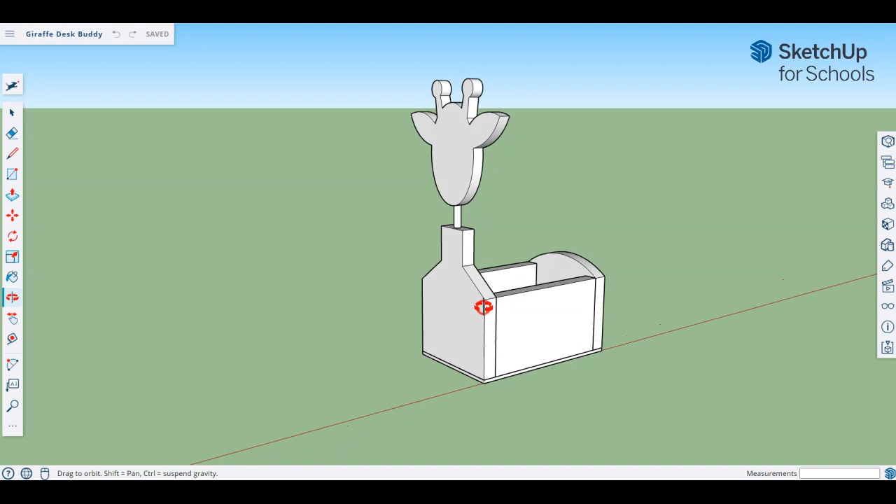Hello students. In these videos we're going to look at modeling in 3D via SketchUp for Schools, our desk buddy. So this is a basic desk buddy that I have done. You might be able to tell that I'm hoping for it to look like a giraffe, and I'm going to be doing this in 3 stages, I think.

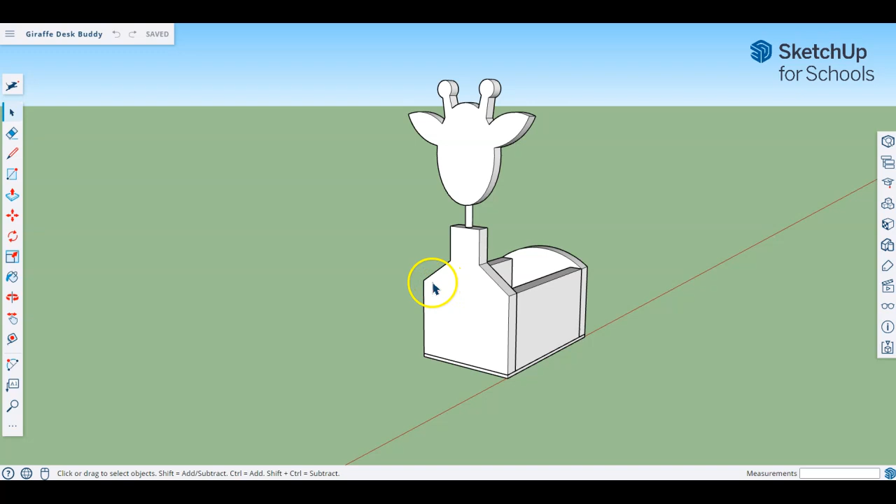The first stage, which will be in this video, will be modeling the basic desk buddy shape. The second video I think will be adjusting or modifying it to have more of this shaping, like the curves and the neck and so forth. And then I think I'll do a third video where I'll go through how to make this headpiece. It looks quite complicated, but it's still using the basic idea of simple shapes being added and subtracted away from each other. So most likely this will be a 3 video process.

And I do think though that the head will be the longest video. So let's start with this video looking at how we can just model the basic shape of the desk buddy, the main box area. So I'll start first of all with a new file.

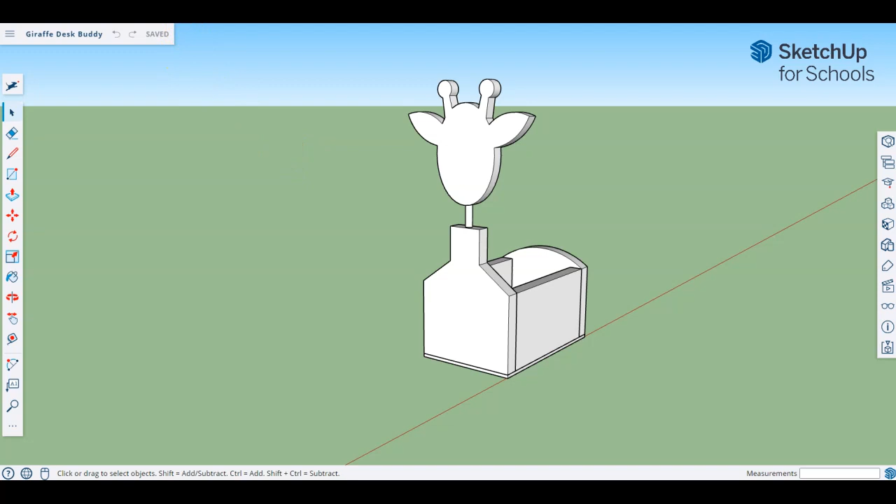So I do have one ready to go. You'd have to obviously log into your SketchUp using your school account and get yourself ready. Now, the first thing that we tend to do is remove the little person here. Remember, they've just been added for a bit of scale.

We don't need them. And I'm going to now create this basic box using a few different methods that you can use and apply to different designs. So I tend to create things in SketchUp mostly from a flat beginning. So I'm going to start with the base.

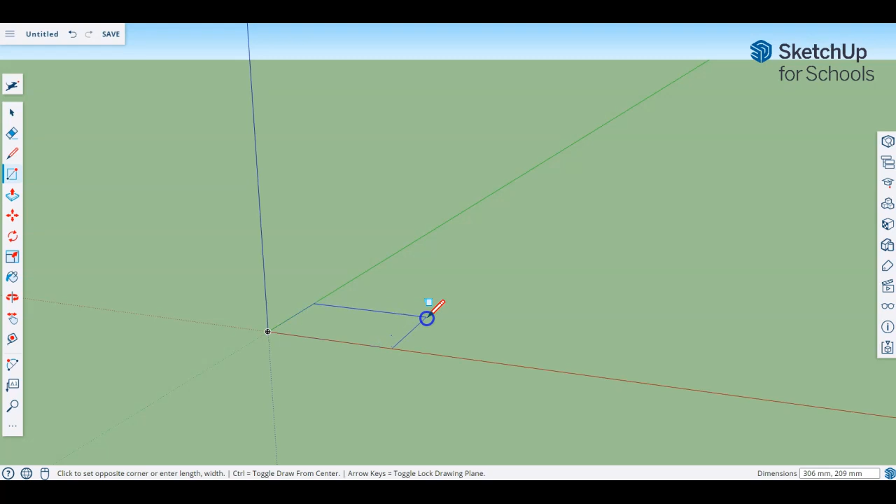Now the base is a simple rectangle, so I'm going to be using my rectangle tool. And I do like to begin all my models from the origin, it just seems like a good place to start. So I'm going to begin by drawing just a basic rectangle. What I'm looking for here is that it is longer in one direction than wide.

That is so that when I let go of my basic shape like I have here, I can look down here in the bottom right hand corner and I can see which of the two measurements is going to be the length, the one going across the red axis, and which would be the width. Because what I want to do now before I click on anything else is type in the correct dimensions.

Because what I've drawn here is something that is just a rectangle of any size, but I want it now to be the correct dimensions. And for the basic box for our desk buddies, that is 140 millimeters long by 90 millimeters wide. So that is 140 millimeters along the length and 90 millimeters on this width.

So we'll do that by typing in the numbers 140, and if you look down the bottom right, you can see in that dimensions box as I type them, they're coming in. So 140, comma 90. The 140 will be the measurement for this direction, and the 90 will be the measurement for that direction. Now I haven't entered the millimeter unit in.

I don't need to because my file already knows that I'm working in millimeters. However, you can add the millimeter unit if for some reason you wanted to use a different unit of measurement. But basically at this point, if I press enter, it has now resized what I just drew to use the measurements that I've entered in. And that is a very, very powerful thing to do.

With most of the tools, when you're adding or subtracting something to your model, if you draw or create the piece and then you let go of your mouse button, for example, and then you immediately start typing, you'll be able to enter in the measurements. And we'll be doing that a number of different times. So let's have a look.

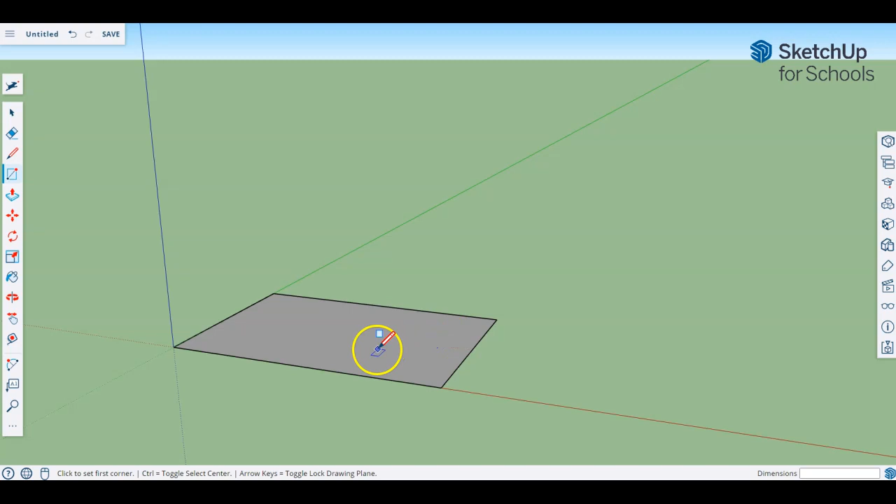If I zoom in a bit closer now, this is the size of my base that will be pre-cut for me. And it's going to be made out of plywood, and that plywood is going to be 3 millimeters thick. So I would like to pull this out to make it also 3 millimeters.

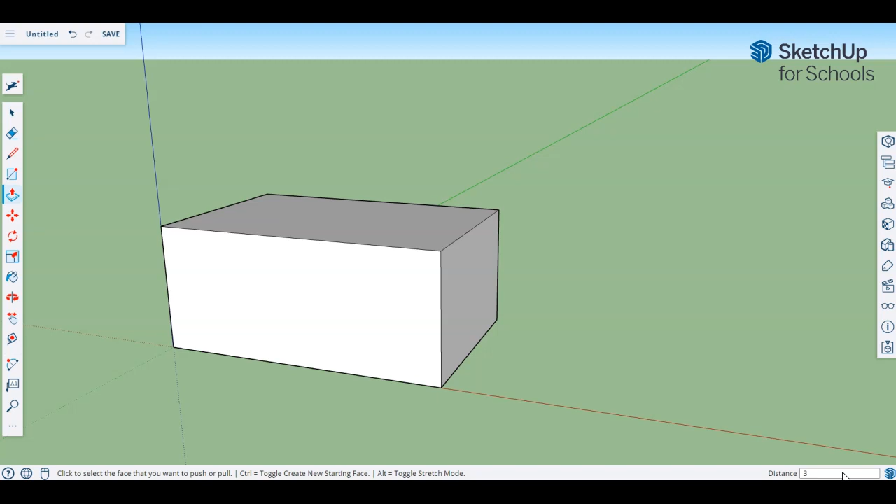So I'm going to come over here and use my push-pull tool. I'm going to be able to select the entire shape there and pull it up. And again, I can pull up any amount, because if I then again let go of my mouse button, don't click anywhere else, but look over here in the distance, I can type 3 straight in. And when I press enter, it's put it back to being 3 millimeters.

So I now have a 3D model that properly represents the base that I'm going to have available. It's 140 millimeters long, it's 90 millimeters wide, and it's 3 millimeters thick. Now, I'm going to introduce a new idea, and that is making things into components.

So if we think about it, we don't want this to be a separate line here and another line here and another line here, and all these different sections that I have to keep organized. I'm going to highlight over everything, and you can see all the different lines and surfaces that have been chosen.

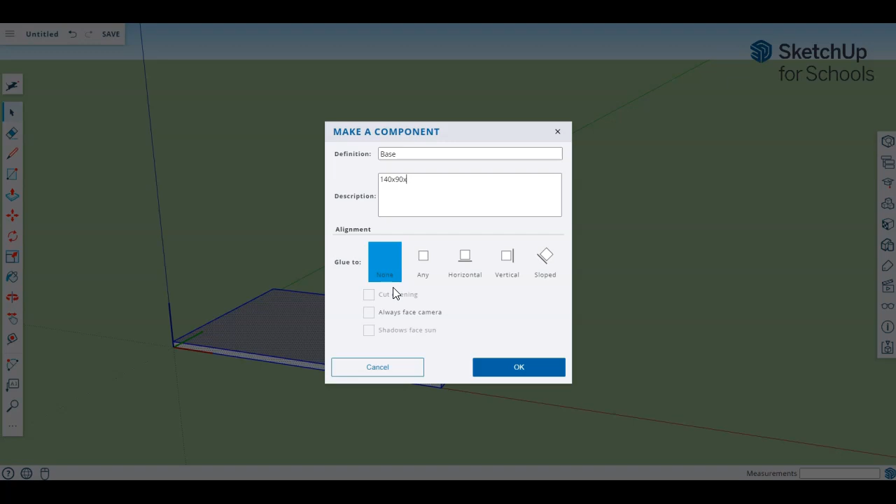I'm going to right click now and say make component, so I'm basically merging these together to be one piece that I can move around and do things with by itself. I'm going to give it a name, so I'll call this the base. And I do like to put something in the description, so this is going to be 140 by 90 by 3 mm, and it's going to be plywood. I like to put some information in the description.

We're not going to worry about these things, so we can just press OK. And you'll now see that is one piece. If I click onto it, you can see everything is selected, and if I click off it, it all goes away. So it's now a single piece, and that is really, really useful, as you'll see in just a minute.

Okay, the next thing I'm going to do is draw in one of the end pieces. Now the end piece is going to be the same width across, which is 90, and they're going to go to 120 mm up to begin with. The way I'm going to do this, I'm going to again take my rectangle.

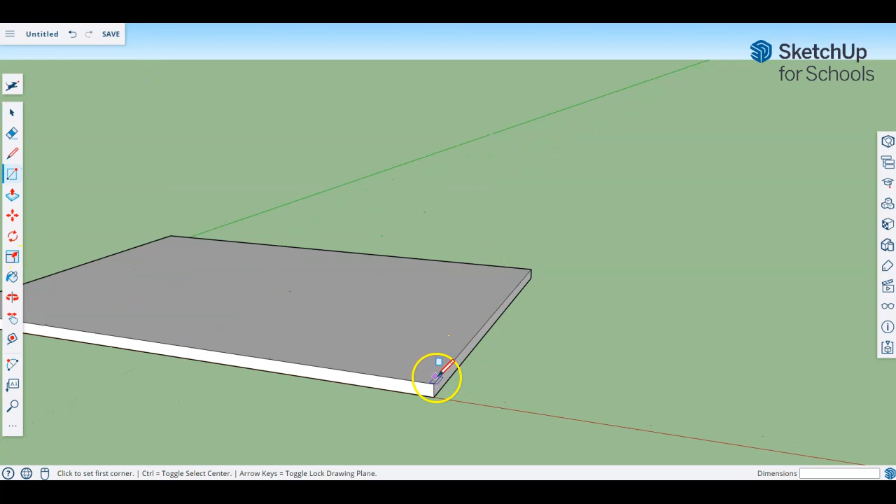I'm going to start by zooming in a little bit and starting with one corner. I'm using the fact that the tool likes to click in and join onto something. I'm going to take it across and lock it into the other edge. Again, I'm not worried about the exact size this way at the moment. What I am worried about is the size that it's locking in on the other side.

If I let go again and look down at the bottom, I can now see that it's saying I've got 90mm and approximately, the wavy line, 15mm that way. I know the 90mm is correct, I've locked it onto these two sides. So it is going to be 90, but the wood we're going to use, the pine wood, is 12mm thick. So I'm going to make my second measurement 12. Press enter, and you saw that it jumped back to the correct size.

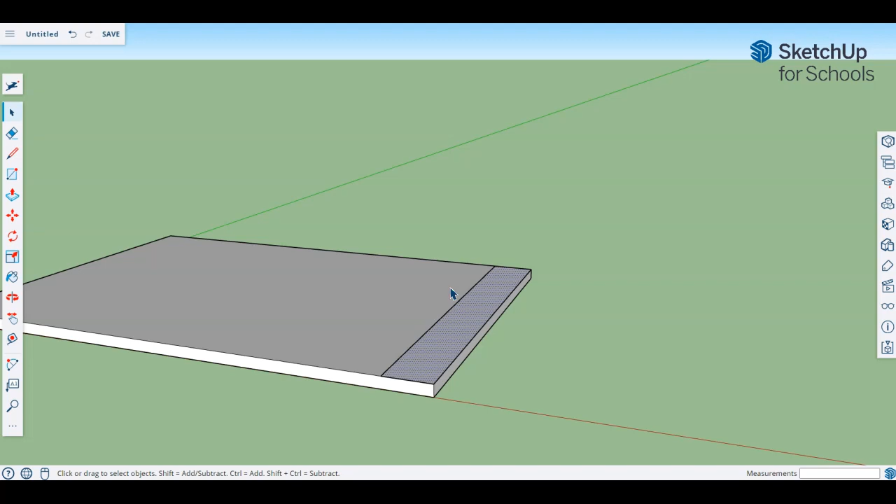Now what I have done though is I haven't actually modified this base. That is one piece, I've got a separate drawing sitting on top of it. And that's another good reason that you would make things into components, because everything I'm doing now is not actually changing this component.

What I'm going to do now is take that and pull it up just any amount. I don't care how much, because I'm going to immediately type in 120. You can see it down the bottom. Press enter. And if I zoom out a little bit more so I can see a bit better, there you go, that is my end piece at its maximum size.

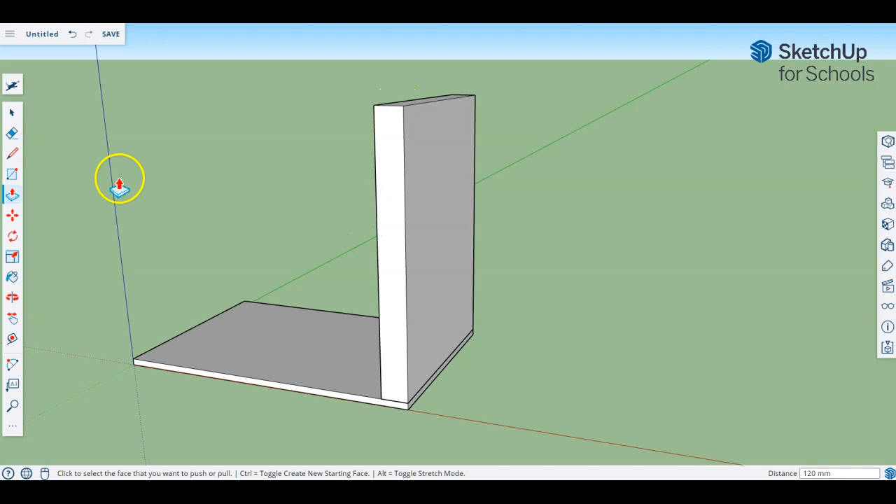Okay, now I want to make that a component as well. So let's take our selection tool, highlight everything. Now it's very important - if you only highlight some of it, then you'll only get the parts of the model that you have fully enclosed in that selection. So by selecting just that, I'm only getting these top pieces.

I didn't get any of the downward lines because they weren't fully enclosed. But if I select everything there, I don't have to worry about getting any of this base, because again, it's one piece - remember, we made it a component, and since I didn't select the whole component, it didn't get selected. It's a good reason for doing components.

So let's make that a component. Make component, and let's call that an end. I didn't bother putting a description this time, just to speed things up, but that is an end. So I now have one end and the base.

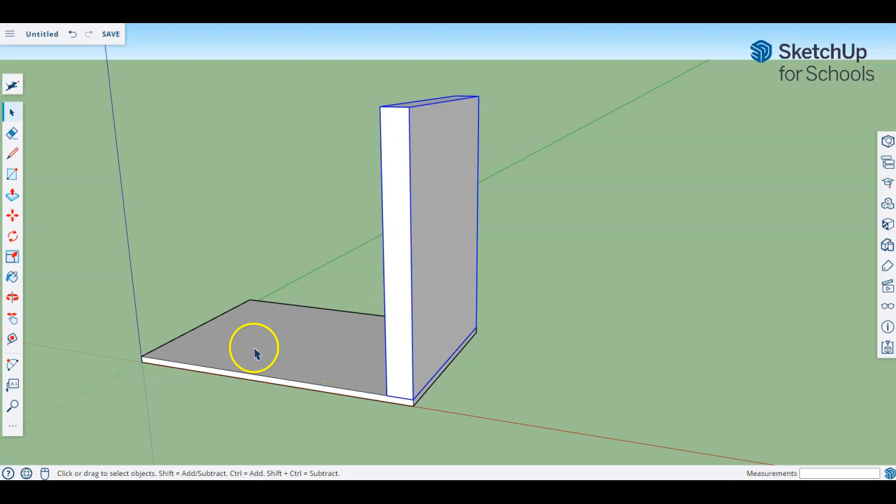I can now copy this end and put it at the other end because they're the same. So I'm just going to simply right click and choose copy as usual. Where did it go? I'm not sure - oh sorry, I forgot, they made them into icons up the top here.

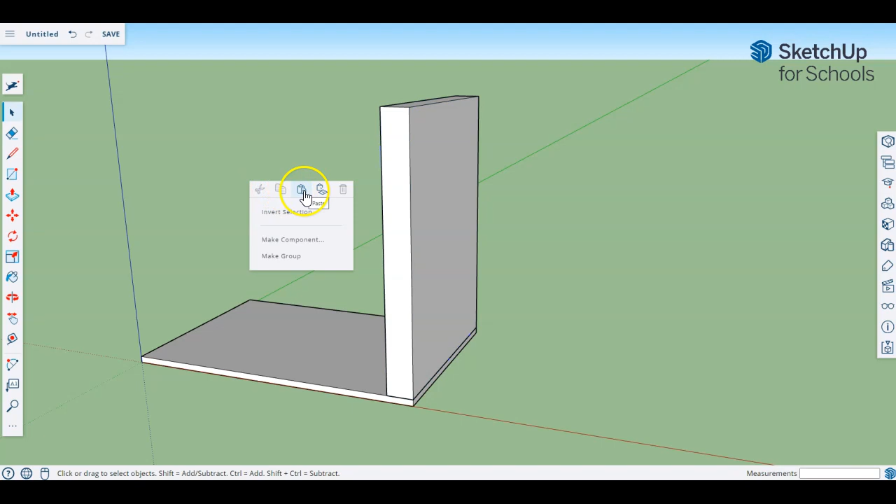So I want to choose copy, and then I want to choose paste, and you'll see that I have another piece here. I'm just going to bring it roughly near the edge, and I'm going to show you another little trick. If I rotate around to get a better view of this, with a bit of zooming in and out, and take my moving tool - this is the moving tool here - and grab that corner, I can lock it to the corner of the base.

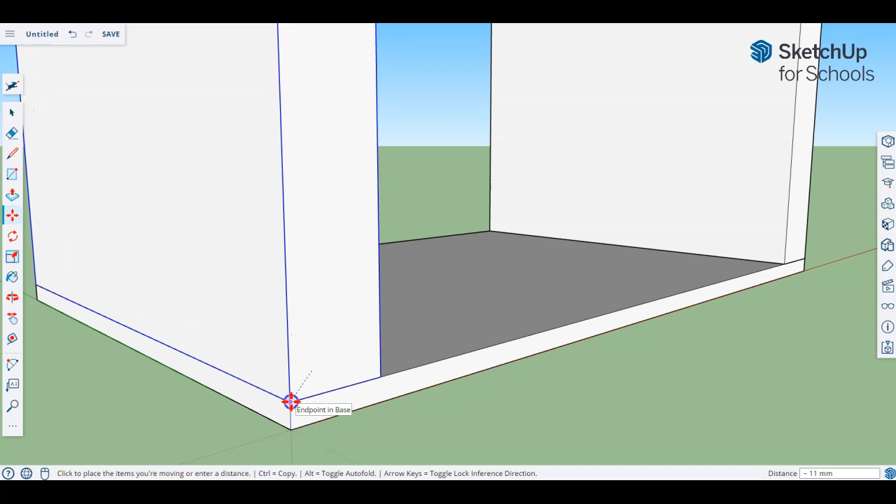I'm making sure that these line up properly by literally locking them together. If I let go, zoom out, and rotate a bit, you can see I've got two ends. I didn't have to redraw it because this end is the same as that end, the one we drew originally.

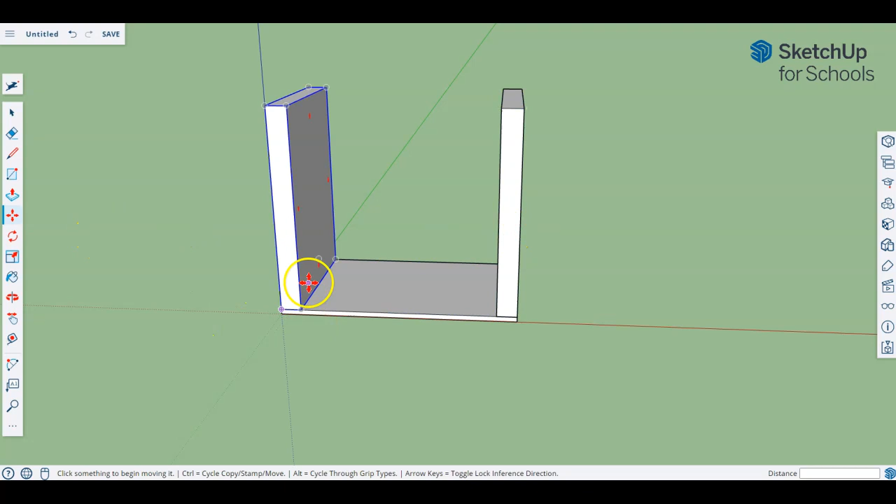You might be able to guess how I'm going to do the sides, but basically the same idea. I'll take my rectangle tool, give myself a decent angle, and draw again using the corner here to where it joins on the edge there. I don't need to worry about how long this distance is because it's sitting between the two edges, so I have to get it right.

Looking down the bottom, it's 116. And again, I'm using 12 millimeters, so I'll change that to 12. So 116, comma 12. There's my piece of wood, and I'm going to pull that up.

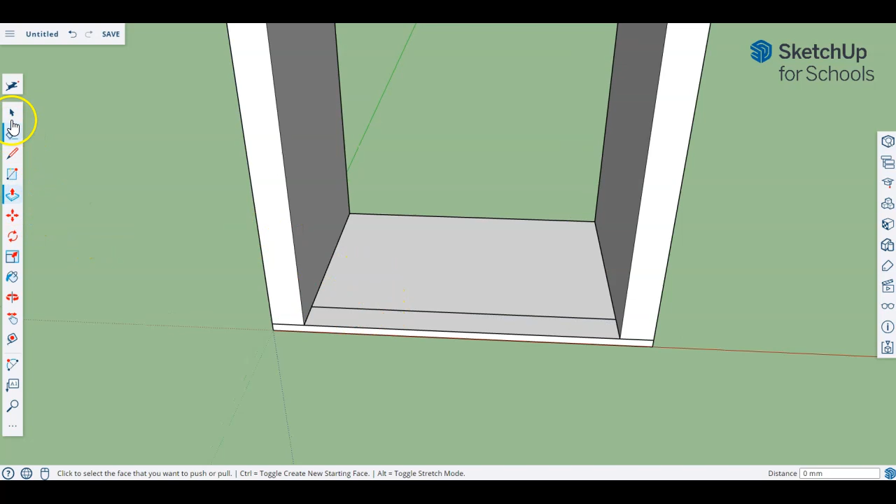This one is a little different because this piece is only going to be 68 millimeters tall. The reason is the way we cut it for you, so just go with me on this. We'll turn that into 68. I typed it in, you see it down the bottom right there, press enter, and I've got a side that is 68.

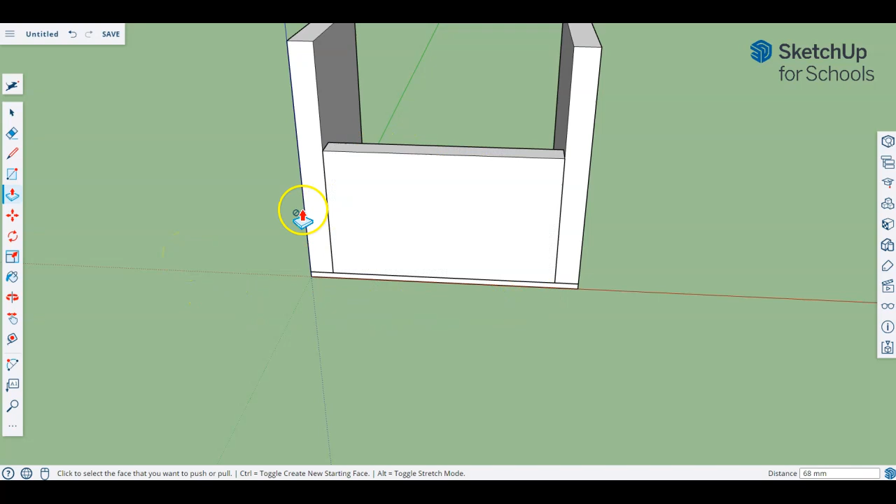So far, whenever we've made a new piece, we've made it into a component, and that's what I'm going to try to do again. But I'm going to select everything that makes up that side. What I want you to notice is I've also managed to choose the base, because even though I couldn't see it, all the base that was back here was inside my selection tool.

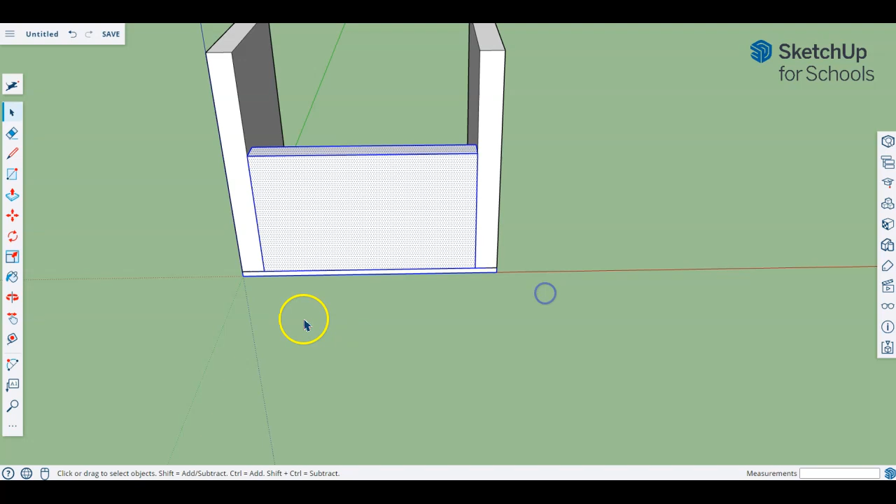So I'm going to show you something that can be very useful, and because I've been making components, this works a lot easier. If I was to, for example, choose this end, I can right click and hide it. So it's not deleted, it's not gone, it's just hidden.

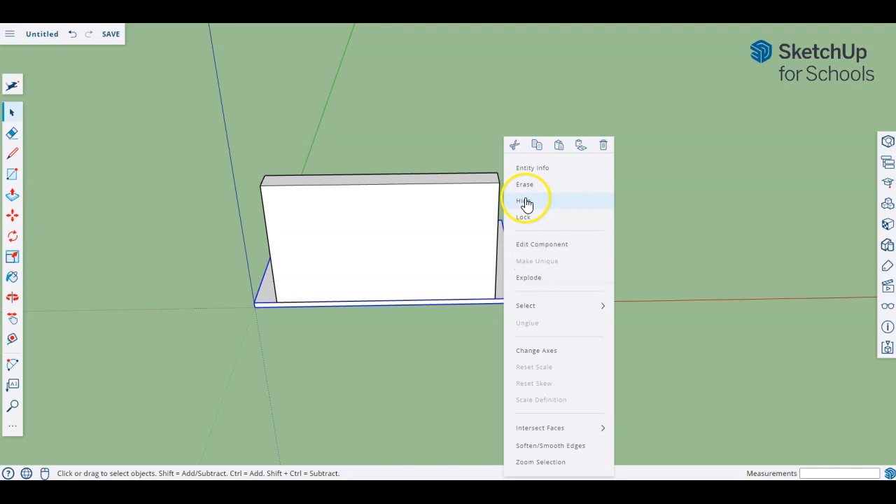That's really powerful. Let's hide some more things, including the base, because things that are hidden can't be selected. Now that they're all hidden, I can easily grab this piece that was the side without worrying about accidentally grabbing things I don't want, and turn this into a component. Let's call this side, and I have that there.

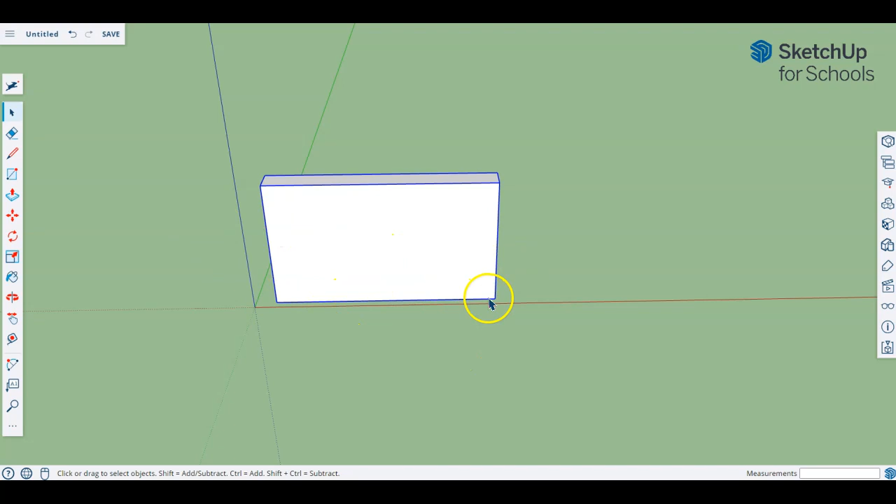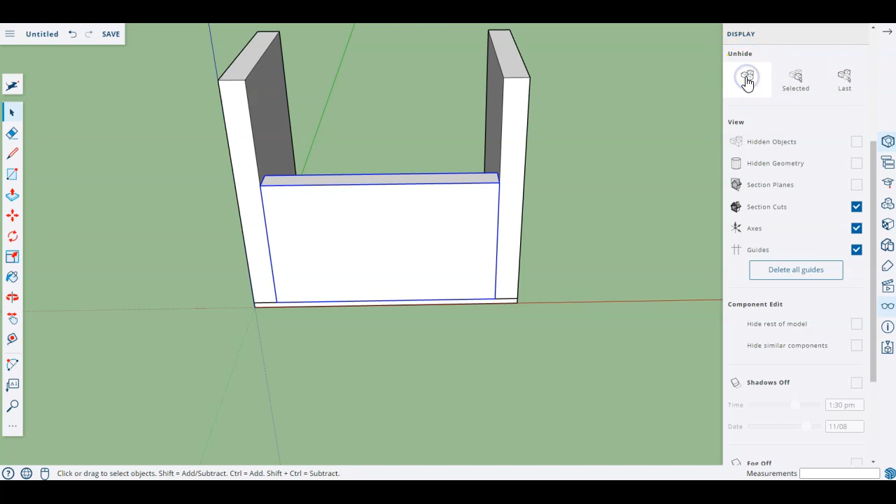Now you might be wondering, how do I get my pieces back? The easiest way is to come over to your right hand side, to your tools, and choose this one here, which is the little eyeglasses icon, for display. You can see right at the top there's a thing about hiding and showing. So I can unhide, in this case just all of them, because I want everything back again.

Let's rotate around, and I might knock that away to give myself some space. Just like we did with the ends, I'm going to choose this one and copy a second one over here. This time I'm not going to right click and choose the options, I'm just going to use the shortcut key.

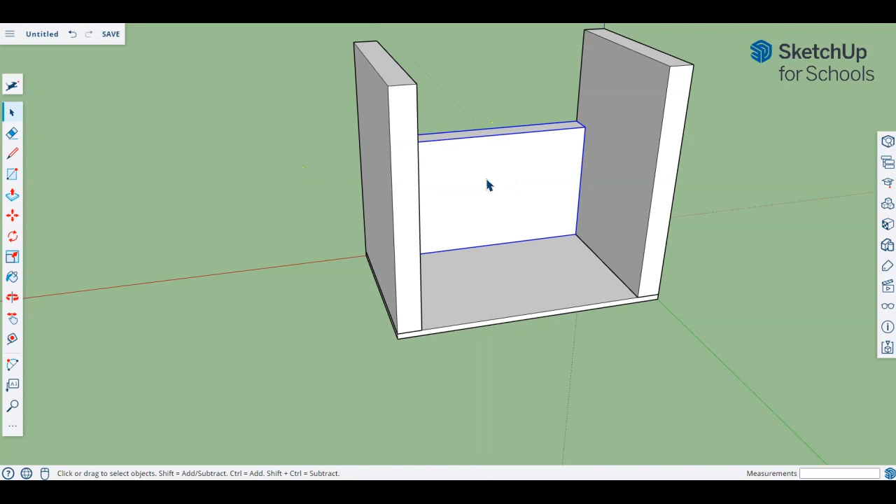Just like in most programs, Control C is copy, Control V is paste, and I'll bring it over into the place I'd like. Then I'm going to zoom in and use that idea of taking a corner and locking it into another corner to put it in place. Let's rotate it back around into our normal angle, and here we go.

We have just modeled the whole basic shape. So we have our base piece, two ends, and two sides, and this is the entirety of the basic shape for a desk buddy, using the pieces that will be pre-cut for you.

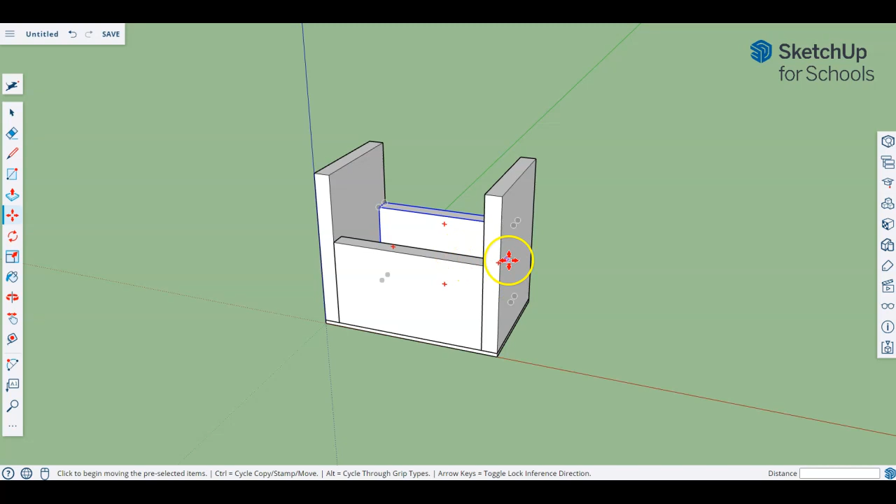In our next video, we're going to look at how we can take this model and start adding some of our own customizations. In the case of our example giraffe, if I jump back to it for a second, that would be adding this curve and changing the back of it to be like this, and also building this neck shape in. We'll look at the head in a third possible video.

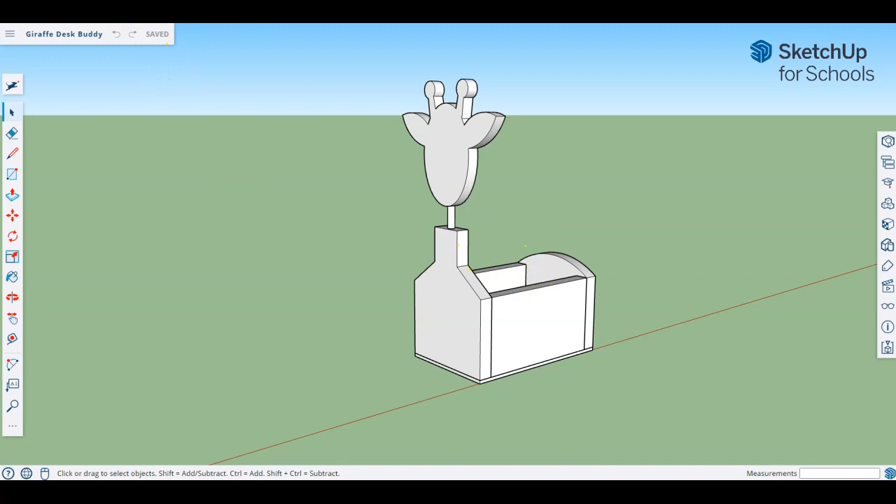Hopefully you've been able to follow along. We've drawn basic shapes, all rectangles at this point, but basic shapes. We've been able to set their correct sizes using the distance or size box down the bottom. We've looked at making things into components, which makes them much easier to manage. We've also looked at hiding and showing different pieces, and copying or duplicating pieces and moving them around properly. So quite a few really useful skills there that you can apply to different models you might make.